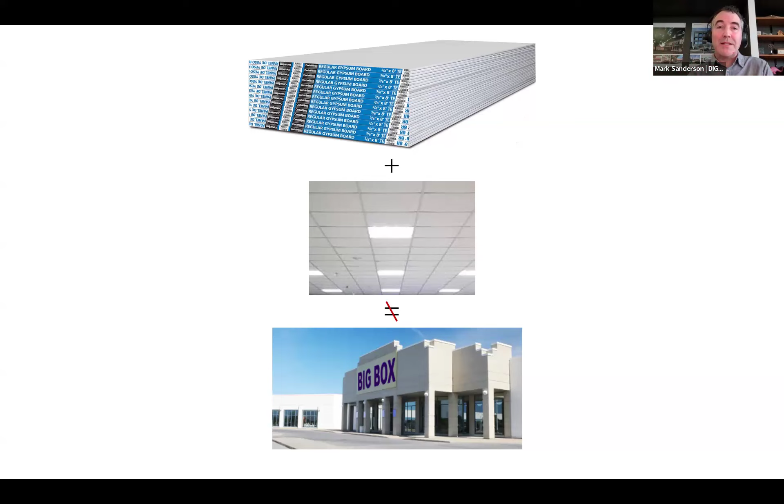That kind of comes at odds, and this is a slide we show often when talking about our work. The way we've come to understand the practice of architecture today is that it's really focused on selecting materials for assembly rather than making, and craft and skilled workers are not as prevalent or highlighted as they once were. This selection of manufactured materials from who knows where—oftentimes we try to track that for different reasons—but they are typically not of a hand or a place or manufactured. They're assembled in ways that lead to placeless or anonymous architecture.

At odds with that is the Clay Studio, and that's one of the things we really loved about starting conversations with the Clay Studio—it is all about making, from the entire spectrum of skill level. They have beginners, teaching all sorts of age groups from the city the craft of ceramics, but at the same time they have residents, artists in residence, international artists with incredible acclaim, and their footprint in ceramics is very much national, but international as well. So we really felt connected to that sense of craft and making.

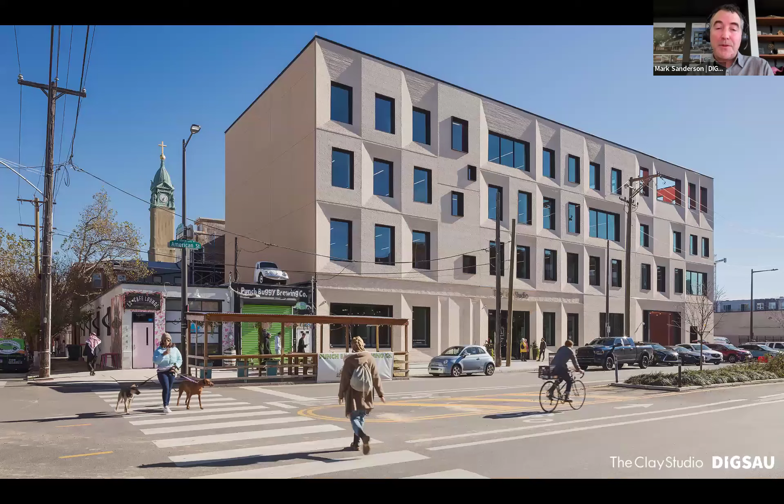So this is the building where it ends up. We're going to go deeper into that, but it's located in South Kensington on American Street.

The next slide shows a picture of some of its earlier roots. The Clay Studio was started, I think, very much as a grassroots group of artists that grouped together to create this kind of place to make art and ceramics, but it grew from there.

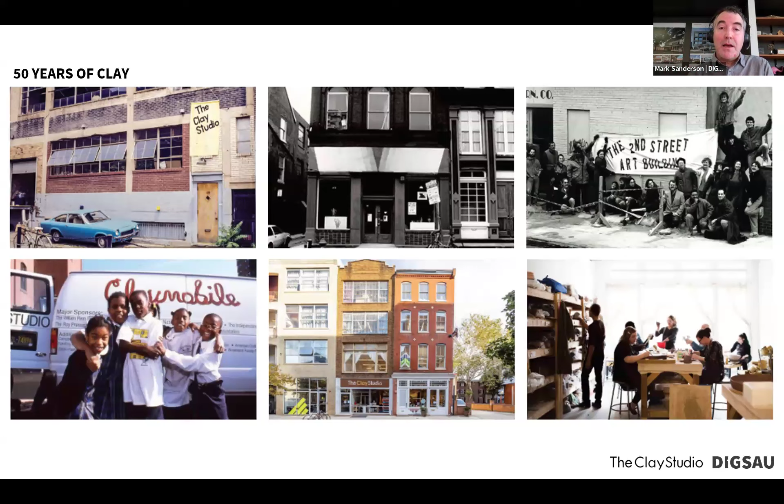They were located over on 2nd Street for many years. That lower middle picture is a place that maybe if folks had visited, they visited that studio—it had taken over two, not row houses, but row commercial spaces right along Elfreth's Alley there. And the interior was, as you might expect, a warren of spaces and storage and studios that had been added onto and collected over the years.

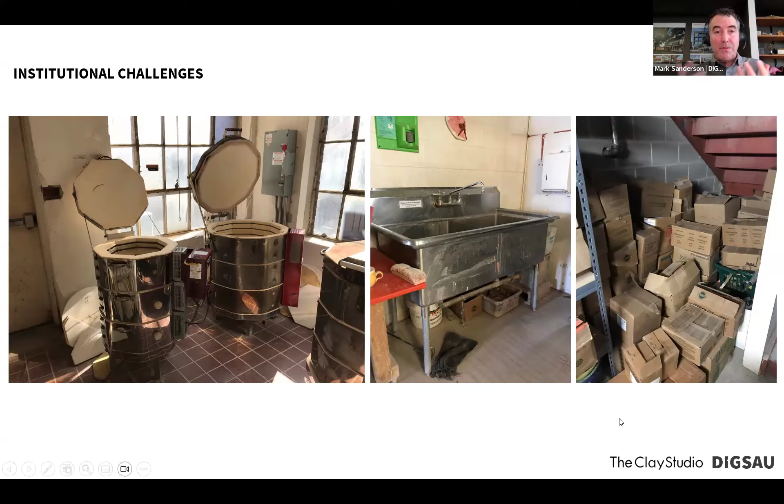One of the things they knew, because their spaces were so segregated in these two structures, was that the community was not as strong as they wanted it to be. So that was one of the major goals of this effort—to build a greater sense of community for them. So we began the search for different locations.

We visited maybe 10 or 12 alternate locations, trying to find a location in Philadelphia that was not going to disconnect them from who they were, but at the same time be a part of a community.

The owners of the Crane Arts building actually were the owners of this site, and they gave a favorable purchase price to the Clay Studio in order to get this site, because of their own sense of values. If anyone has been up on this portion of North American Street, it's dramatically different than when we began our project there—there are probably several thousand apartment units, as there are throughout Philadelphia, but this is really a transformed street over that time.

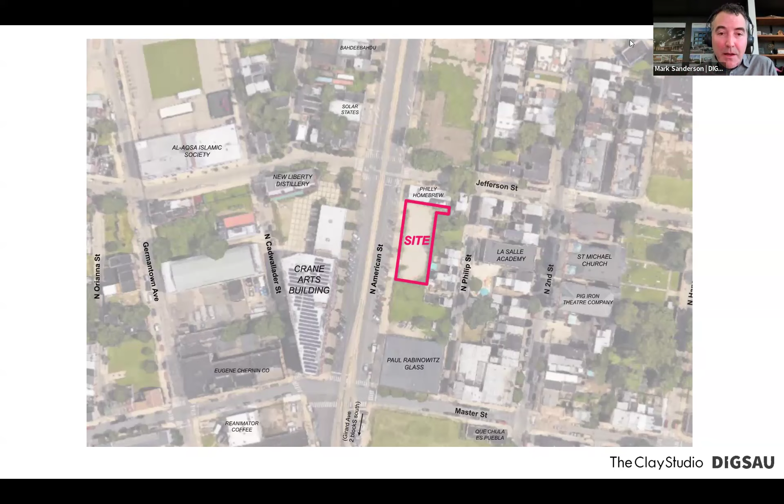So the next image is, again, kind of going back to the sense of making. The sense of this was something we began to think about in terms of the hand, how this particular craft is made. There's a sequence to it, and this is something we found really interesting—how to connect the building to the making that happens inside of it.

Those familiar with ceramics know that the first firing leads to a bisqueware. It's kind of a brittle ceramic at that point—it doesn't yet have its durability. It's the second firing that actually brings the strength to the ceramic. That's also the point when you often do the glazing—there are some ceramics where you don't, but that is where the glazing happens, on the bisqueware. It gets fired again, and you begin to get that incredible chemical reaction of the glaze on the ceramic.

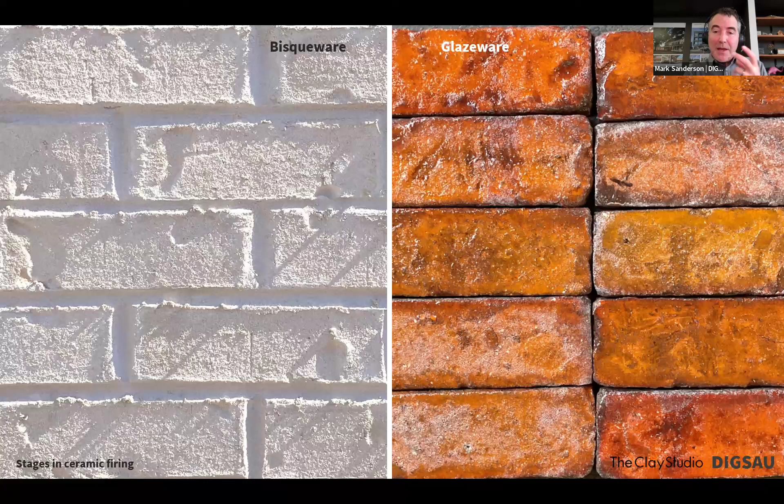So that was a point of inspiration for us. These are some of the materials you see connecting to that, where we wanted to find a brick that communicated the sense of a bisqueware versus a glazed finished brick, which we use as a highlight throughout the building.

Jesse, I think we're handing it off to you here. Is this a spot? I could certainly jump in. I think we're going to take a quick tour through the building, but I'm also happy to do that. Okay, why don't you go ahead?

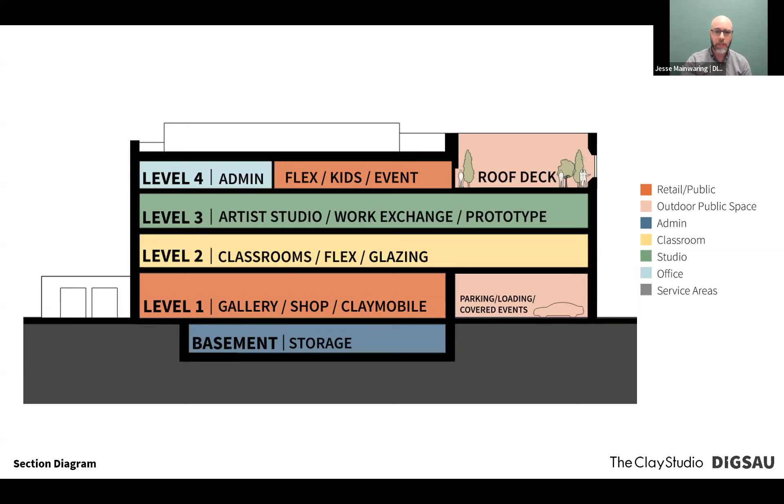So this is the section that starts to show how that program stacked up. The facade was really designed to highlight each of these program elements, almost creating a curio cabinet where you start to see them from the street, but also once you're in the building, they're organized in a way that makes it abundantly clear all the various things they're doing.

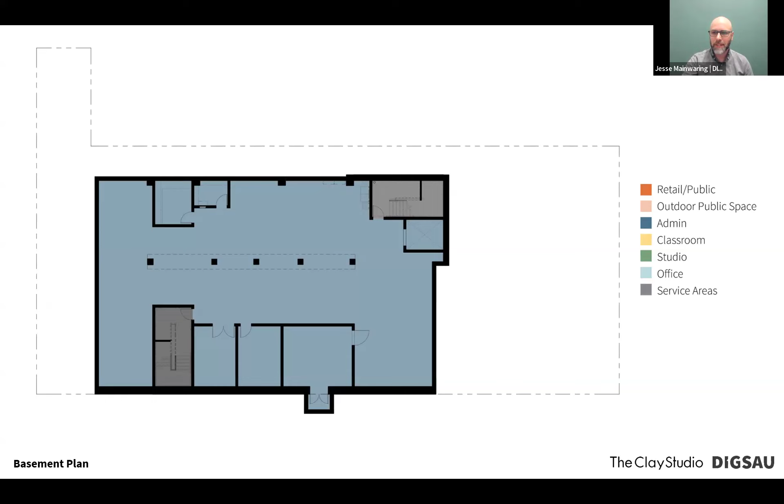We'll start with the basement, which isn't the most exciting space, but is incredibly important for them because their storage capabilities were really stretched thin previously and distributed through the whole building, which led to a sense of chaos in the space. So they actually worked pretty closely with donors to get money for the basement itself. This is one of the highlights of the project, even though it's not something most people would see.

This is the first floor, where you can start to see a constellation of various program elements. The gallery is on the left-hand side. You enter the building through what in other instances might be more of a gift shop, but they really view it as a small wares gallery. One of the amazing things about them is that at pretty much any dollar level you can walk in and purchase something that's of world-class quality. So their shop space, the first space you enter into, really focuses on those small wares, and then the gallery space on the left covers more of their...

Jesse, if you jump back, I'm going to add a couple other things there. If you could just highlight that small green space in between. Yep, so that particular little space opens up into the shop, and it can be converted either into shop space or, more interestingly, a little mini artist studio space. So you start to see the color green here.

This is one of the levels that actually has a variety of program elements on it. That little space is a place where they'll have artists come in, either resident artists or visiting artists, to do work either on display to the street, or have folks come in from the shop and just see them making ceramics right in that space.

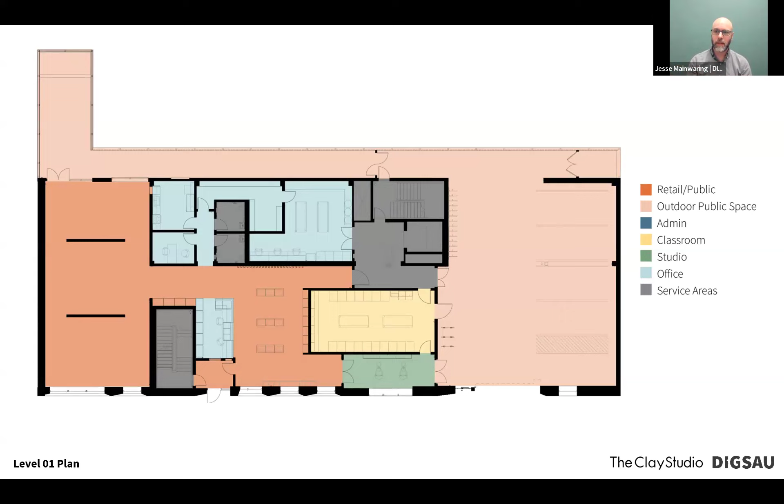That touches on one of the key challenges of the project: the building is 40,000 square feet. As Mark mentioned, we're really maxed out with the largest building footprint we could get to. They could have easily had a 60,000 square foot building and made use of it. So every area where we could have a space do multiple things, we did, and that parking or pavilion area is one of the key spaces. They had a budget for about a 15,000 square foot building. Yeah, we stretched the dollar.

So this is a shot in that shop space. The cup wall, which they're really proud of, is on the right, and that's an area where you can see some of those small wares that I was talking about earlier. And you're looking back into the gallery space.

So there's a high level of finish down here. This is one of the few spaces that isn't really rough and tumble and isn't firmly focused on making, much more on the presentation side.

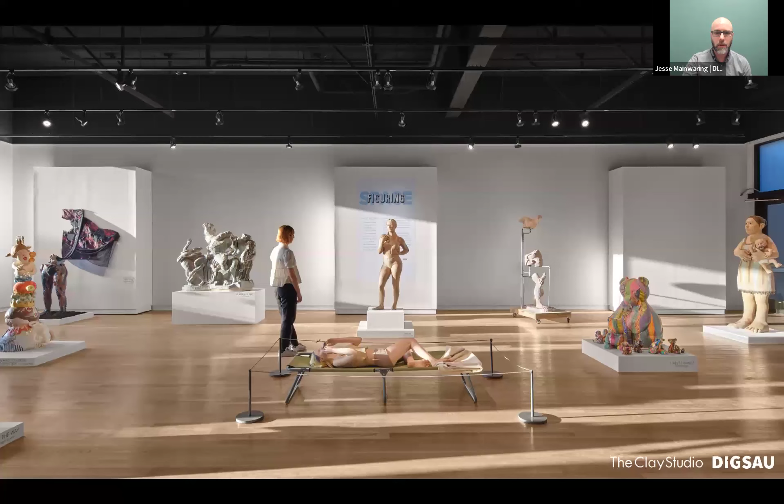Here's a shot within the gallery. Fairly classic gallery space, a lot of overhead structure in place to support hanging things when they want to, but it's really kind of a clean presentation space for the variety of their gallery shows.

And here's a glimpse into that events or parking area. This is kind of the day-to-day experience of it, when the Claymobile, which you see on the left, is kind of loading things in and out, and they're using it as a key logistics center. But you can see we elevated the finish in that area to use the glazed brick, so that when it flips over into party mode, it does not seem like a parking lot. It is very clearly a kind of partially enclosed event space at that point.

Moving up to level 2, this is the key classroom space. It's packed to the gills. One of the interesting things is every student who takes a class here gets a cubby. And so what you see in these little cellular structures along the hallways and flanking the gallery or the studio spaces are all the cubbies. And so the building was designed to handle 600 students. There's 600 cubbies. If they want to increase that, they need to increase the cubbies. So we packed that space as full as we possibly could.

There's a range of gallery spaces, studio spaces for wheel throwing and hand building and all sorts of stuff in here. Kiln areas, prototyping. They have a lot of classes in the program.

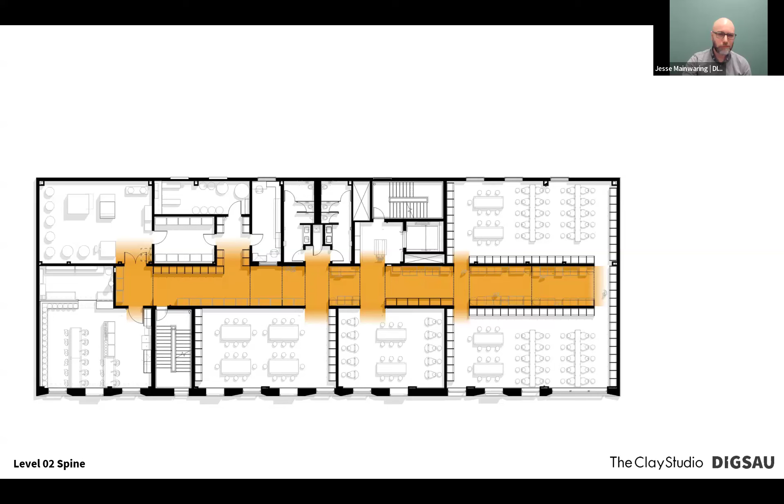And what they start to do is they pick up all of the ancillary things that a studio space needs to do. For instance, sinks, clay pressing, and a whole variety of different tools. So this is a glimpse of that space.

So we elevated the finish a little bit so that it would feel very much like the heart of the building. And that also helps to shroud some of the more functional elements within the space that you can see peeking out, a lot of the slop sinks and other areas for staging of various ceramics and so forth.

Quick glimpse into the gallery or into the studio spaces. You can see the cubbies. And again, these spaces are really rough and tumble for the most part. What you're seeing, the ceilings are the exposed precast planks. The floors are just the topping slabs. The walls are very straightforward, and the cubbies themselves become one of the key architectural features. That's all Baltic birch, which actually was really hard to get because of the conflict in Ukraine shutting down the supply line of that.

All right, then coming up to the fourth floor, this is another area where you start to get a little bit more of a range of programs happening. For the most part, it's focused on events. There is a small studio space that you can see up at the top. This is where they do a lot of their after-school programs for kids, but it's also a place where if you wanted to rent it out as an organization, you could take over the space and do team building exercises and things like that. And then there's a large covered or open roof deck and some administrative spaces up there.

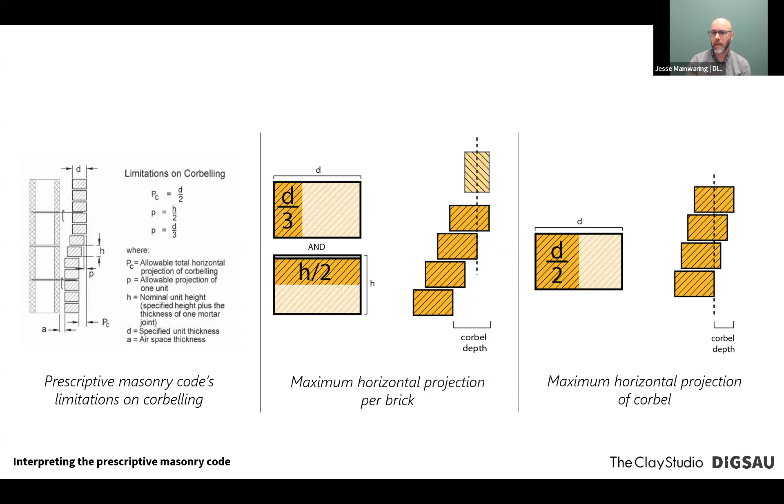One is the limitation of how much you can corbel an individual brick per course. Two things govern that: dividing the depth of the brick by 3, and the height of the brick by 2—that's what you see in the center image. The other is the maximum amount of projection for the entire run of corbel you can get, which is really shallow in the prescriptive values: the depth of a brick divided by 2.

So this is simply looking at both of those versions. What you see in the center would be the maximum amount of corbeling or depth we'd be able to get within the facade if we followed strictly the prescriptive path—just under 2 inches, not enough to do the kind of volumetric things we wanted to do with the facade, as Mark described. We were heading more into the 7 to 9 inch range, which is starting to show up on the right-hand side.

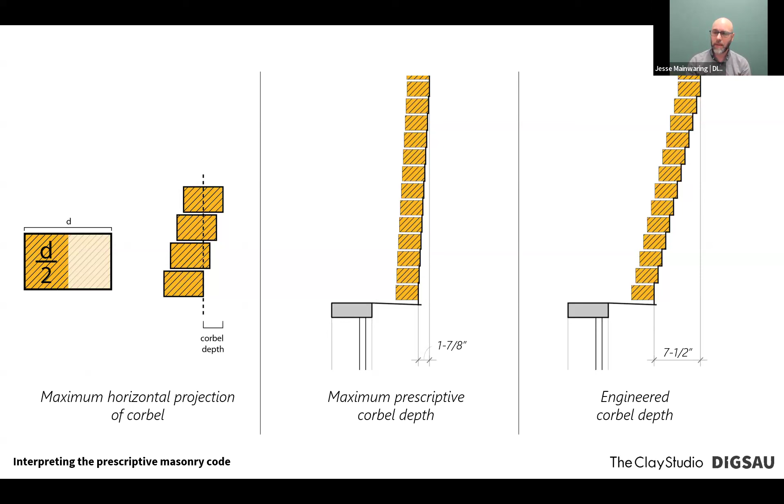It became clear to us that we were going to have to engineer the corbel beyond the prescriptive values within the brick code to do that. It means every element of the facade—the ties, the backup assemblies, and so forth—ultimately would need to be engineered.

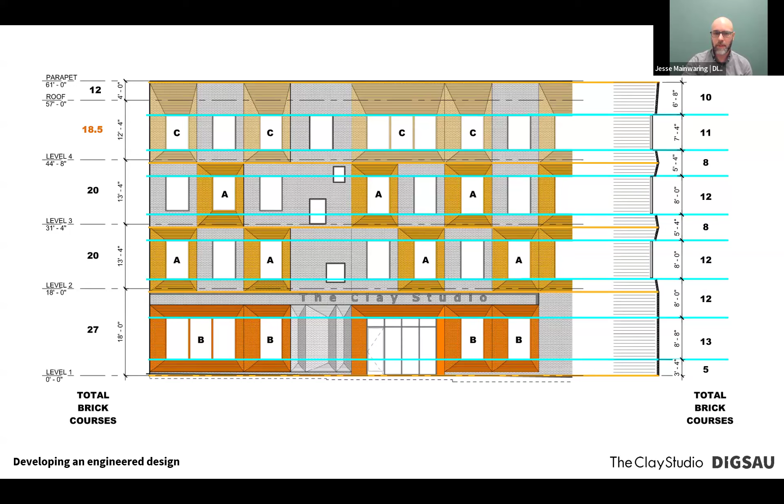So this is a diagram we did early on, trying to regularize the facade as much as possible, coming up with modules we could deploy, so we'd get the range and expression we wanted within the facade, but playing by a system of simple rules. We came up with three different modules and ultimately deployed those in a pattern that stopped the eye in interesting ways, while providing a simple common framework for the facade.

What I'm going to do now is walk through quickly a series of the various bearing elements and how the various components of the building work together.

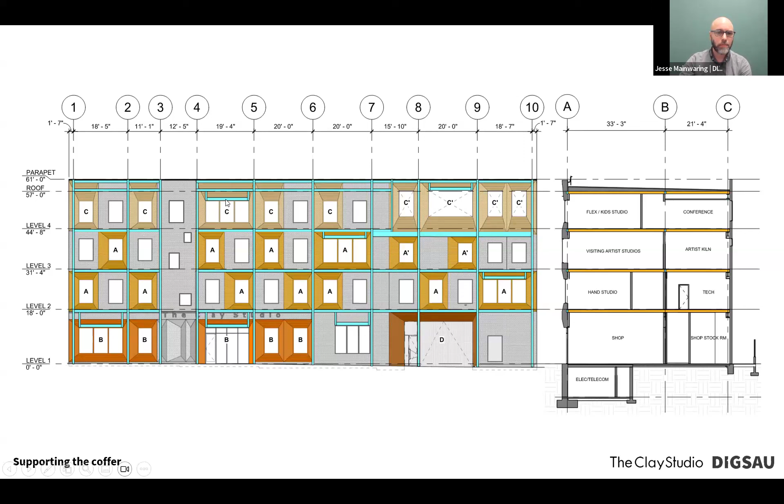The building is a blend of precast planks for all the horizontal structure and a load-bearing tube steel frame. What you're seeing in blue is the tube structure that supports the brick, highlighted on top of the brick pattern itself. The bricks get relieved at every level, so we're really only trying to carry one story of brick at a time. Within that, we also tried to limit large openings that would require supplemental support—you can see a few instances where openings exceeded what we could do with a loose lintel, so we get a secondary lintel tied back to structure that supports that.

As we got into what that backup assembly would look like, we evaluated three different ways of dealing with a cold form assembly that could support the depth of that facade. Because we had about 7.5 inches of depth, that brick load was going to put some overturning into the cold form—it wasn't only dealing with the kind of lateral wind forces a backup assembly would typically handle. So we needed a strategy that could handle all of that.

The first thing we looked at, the most conventional cold form on the left, would be to run it plumb and vertical straight down the building, with the brick itself carrying all the geometry. That would require a lot of variation in the brick ties—probably an unreasonable amount—and it wouldn't give the masons any geometry to play off of. They would really have to lay that brick up almost blind, which we saw as a real challenge.

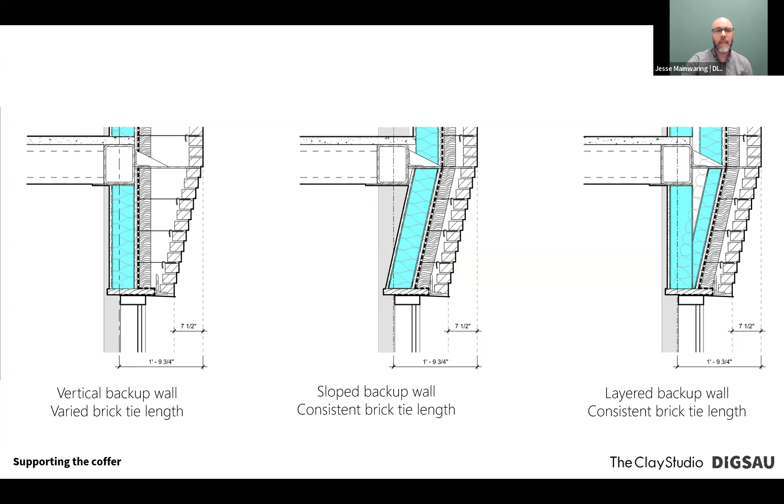An alternative, in the center, would be to slope all of that framing, but that creates really complicated detailing on the cold form side and pushes it out of what's feasible. So where we landed was the approach on the right-hand side, using a double layer of cold form: an internal layer that's plumb and straight, designed to handle all the loads, and a much thinner, lighter layer on the exterior that provides the geometry. So the masons were given effectively a template through the backup assembly that carried all the geometry, and it worked out pretty well.

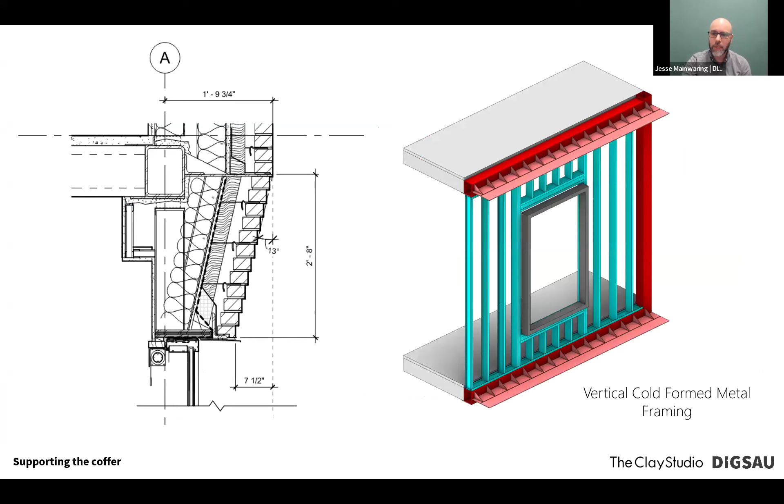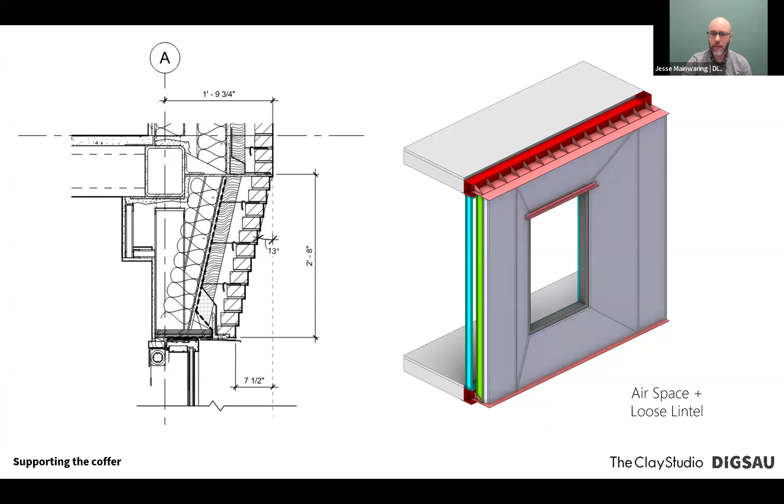I'm going to go through a quick series of slides showing that three-dimensionally. Here's the tube frame—you can see an integrated brick shelf embedded in an upturned HSS beam. Here's the first layer of cold form being added, then a second layer for the geometry. Then we start to get sheathing applied, and now you can see the geometry a little more clearly, followed by a conventional assembly going on top of that, all the way out to the bricks themselves.

How we would handle some of the brick transitions at key moments of geometry became a real talking point. This was our first pass at it, where we looked at pretty much every course. This diagram follows from the head of the window and covers every course as you work through the diagonal, and we were looking at how cut bricks could be used to achieve that. For the most part, the building's on module, but there was no way to maintain the module in that dimension without custom bricks, which we couldn't afford.

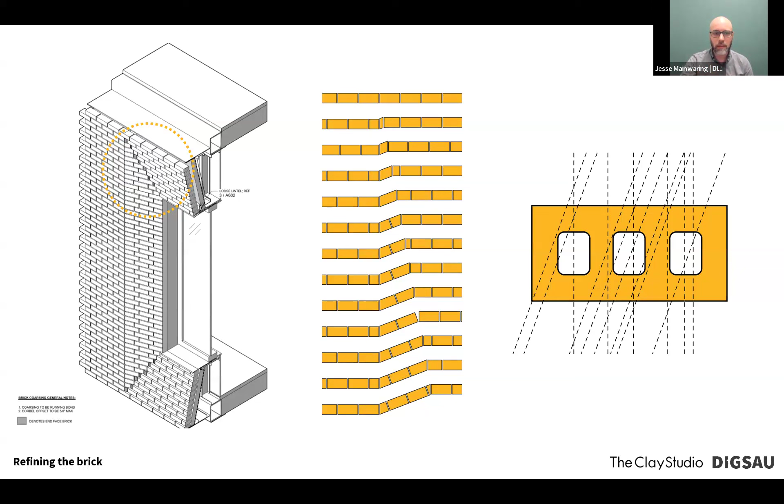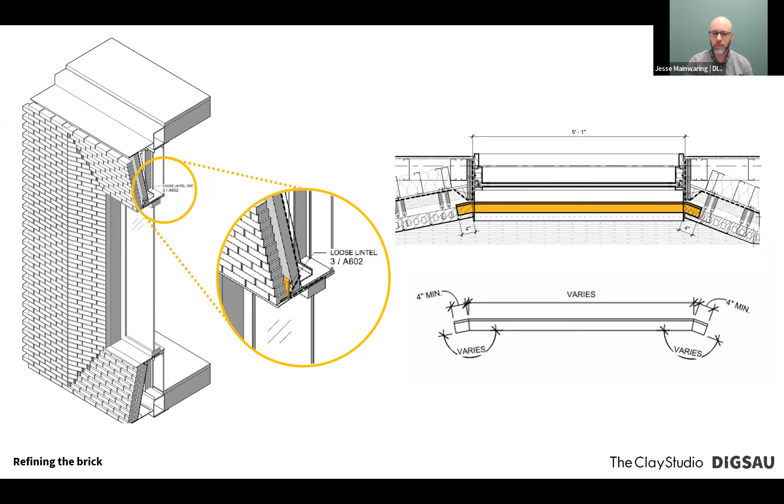Our initial thought was to embed all of the cut bricks within that angular joint. I'll circle back to this a little down the line. For those curious about achieving a loose lintel in an angular geometry, we had to inflect the loose lintels to carry that geometry, and we worked with the engineers to push the limits of that.

One of the last things we looked at in the design process was how we might manipulate the bond further. These studies on the left show adjusting the bond or displacing bricks within a conventional running bond. What we quickly found was that was the wrong design move—it panelized the facade and took away from the volumetrics of it.

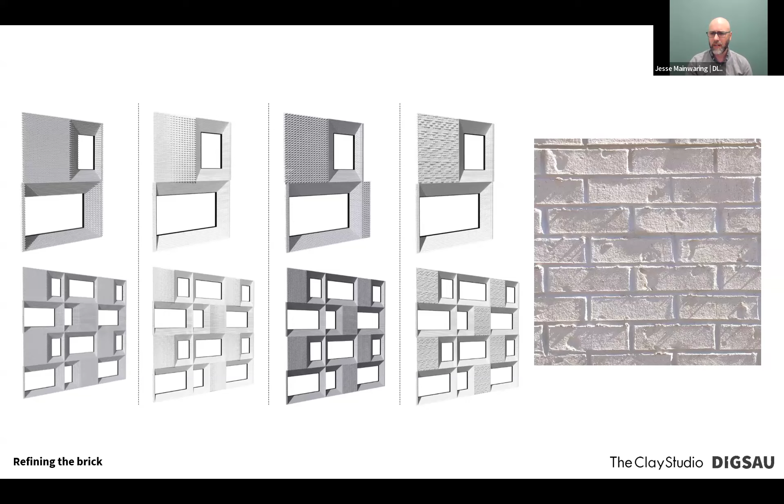Where we really landed, which is what was built, was that it was the brick itself that should carry a degree of variation and an expression of craft. So what you see on the right is the varied bricks that we ended up using.

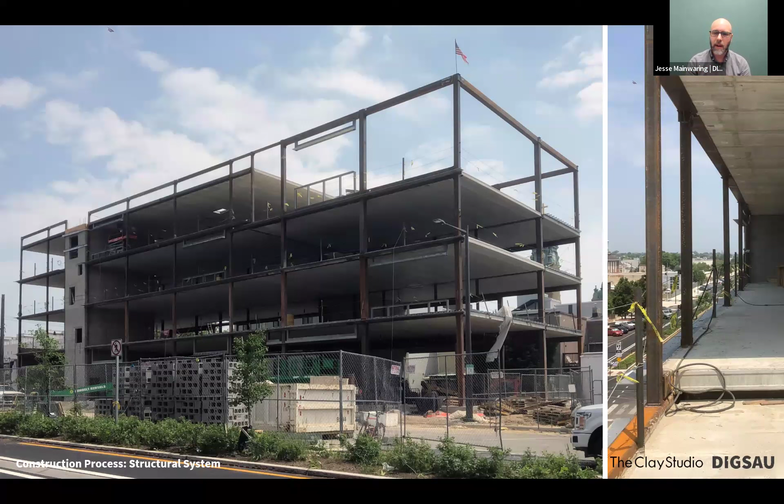I'll run through some construction shots. Here you can see the steel topped out, with some of the supplemental lintels that carry the larger openings. On the right-hand side, you can see the precast planks engaging with the upturned beams.

We ran through some quick mock-ups of the cold form and found it was actually a really simple thing to do. We were concerned about it during documentation, but the cold formers were great—they worked with us and we found ways to refine it even further.

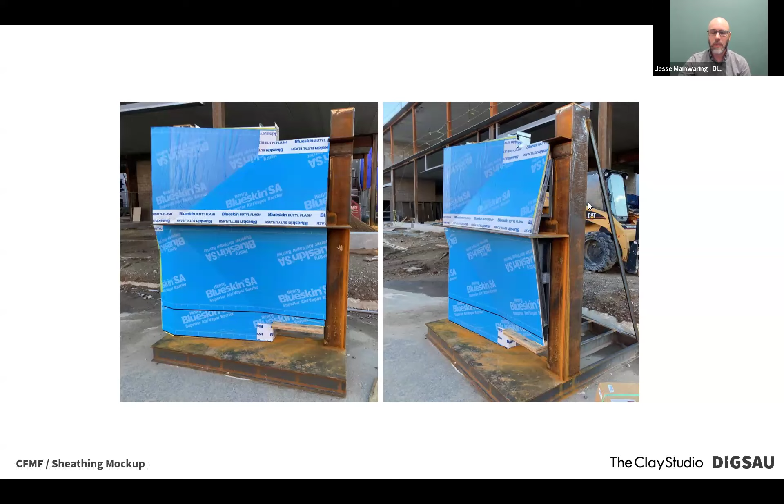You can see how slender some of the exterior members got once the cold form engineers took over and did their delegated design. As that went up, it was interesting to see the skeleton of the building start to emerge along with the geometry, and it ended up being one of the more seamless aspects of the design.

You can also see we had a significant fire retardant treated plywood buck that carried all the windows and openings. For the most part it's an incredibly conventional cold form backup assembly with a bit of an unconventional secondary layer added to it.

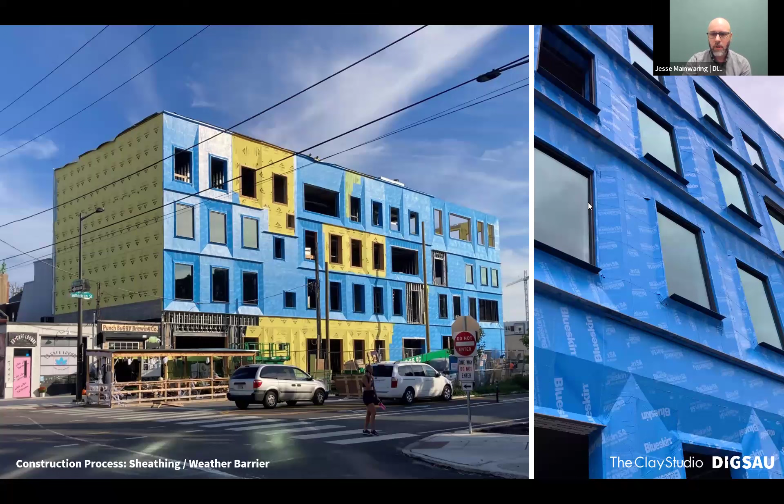Here's the building wrap starting to go on, with the enclosure getting to the point where the brick's ready to roll. This is where a lot of engagement with the masons was required to contour the bricks exactly how we wanted. We ran through three mock-ups before we got it right.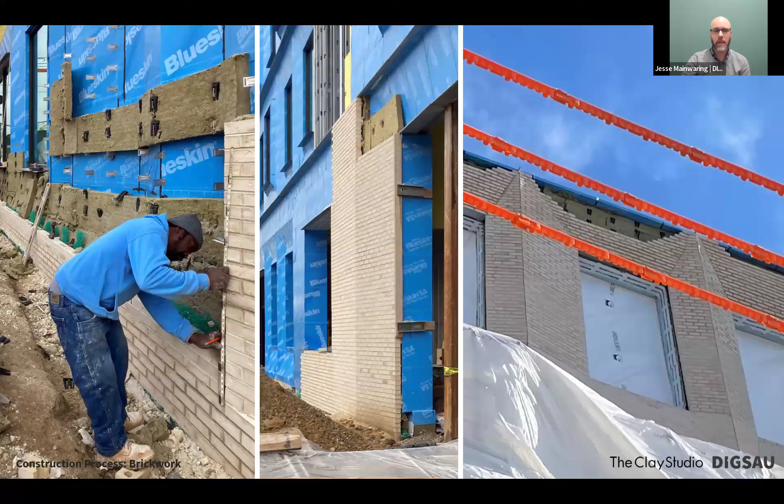Some shots of them beginning to lay this out. The first pass on the building was tricky—it's one thing to get it right on a mock-up, another thing to get it right in the field.

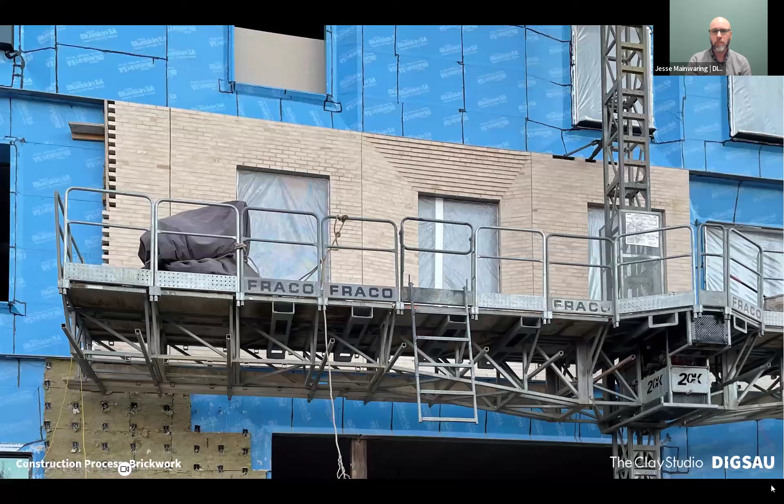So you can see some areas that ultimately had to get adjusted later. That area on the upper right had too much waver and they had to take it down. But for the most part, it went really, really cleanly. We were really happy with it.

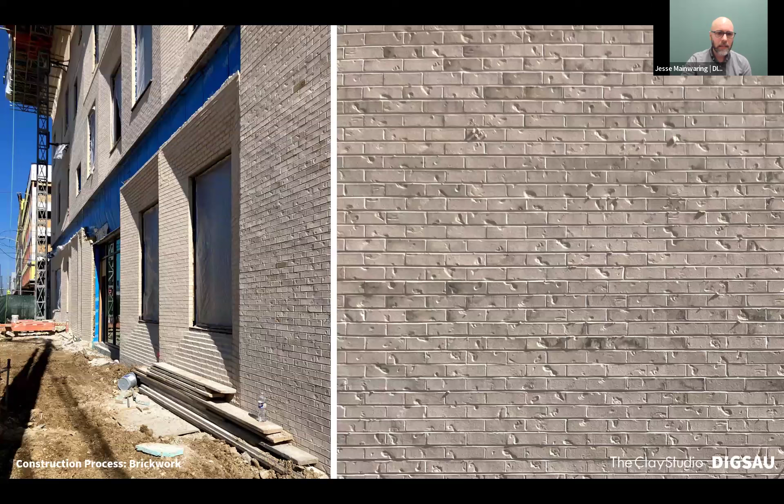There's some degree of precision in this, so the corners look nice and crisp. But on the other hand, there's a good amount of variation that we think really speaks to handcraft and provides a lot of surprise and human touch to the building.

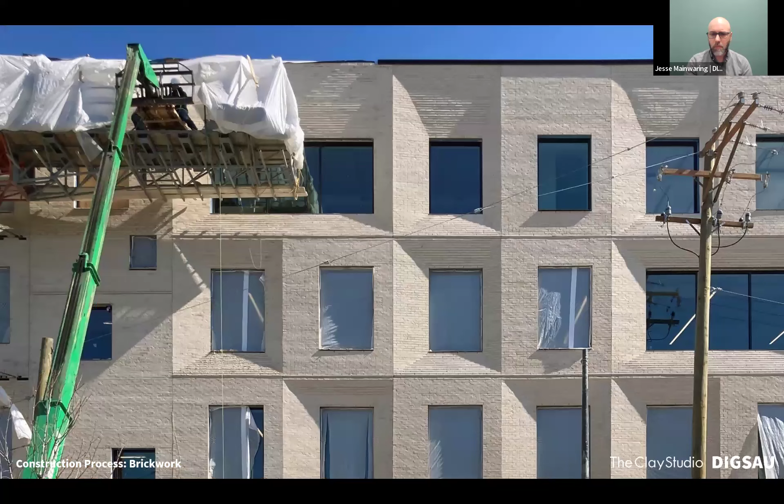So here you can see both the effect of those varied bricks with sunlight raking across them, and a sense of what the coffers looked like as they were advanced further. And here's the building almost complete. Here's the brick topping out, and then the view without the mural there.

Let's just kind of bring it to a close so we can open up for questions, Jesse. Yeah, that's really it. So here's the final image.

Again, we were really happy with the balance that we achieved with the masons between precision and crispness and that human touch. And we know the Clay Studio has been really happy with the building as well. So with that we'll rest and get into any discussion.

I have a few. So first off, this was when we came to you guys with the prompt for this, this was exactly what I was hoping for. So getting into the nitty gritty, what was the thing in your studio that made everyone crowd around and say, what do we need to do here?

Thank you for sharing so much of that detail and information. Very exciting, and I appreciate you sharing. One thing, before we jump into questions, can you just name the design and construction team, give them their little shout out, and talk a bit more about that collaboration?

Yeah, we worked with Jeffrey M. Brown, who many of you have worked with. They were a Philly construction team that had been around for a long time. They were brought into the project early and were engaged as a CM, I think probably about halfway through the design development phase, and they carried it through to completion.

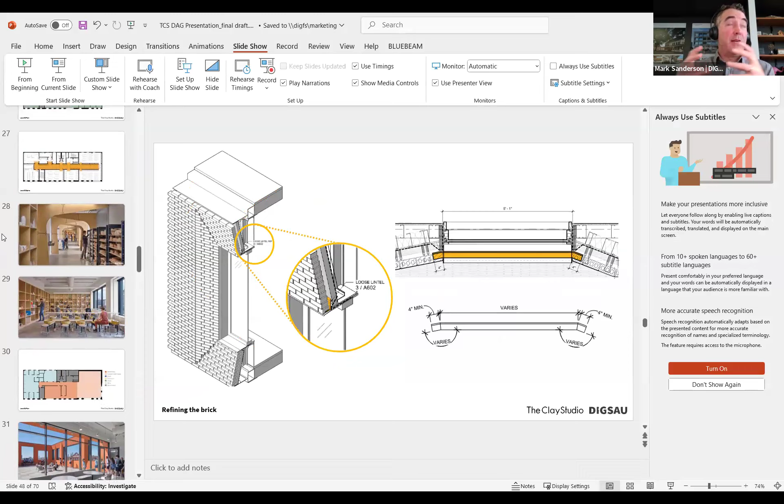Yeah, I would say it started with really condensing their program down to its absolute necessity and core, and that resulted in us trying to find as many ways that we could kind of cleverly use spaces for more than one function.

All that being said, once they launched and opened up the studio, they have a waiting list for their classes now that is several months long. They've been incredibly successful in both their fundraising and their movement forward. And as most organizations that find that success, they very quickly decided that they made it too small, although they absolutely could not have added another foot.

And we were stretching their funds, and it was a really fraught construction process. So the very first point was that kind of condensing of the program. The second one is in the bidding.

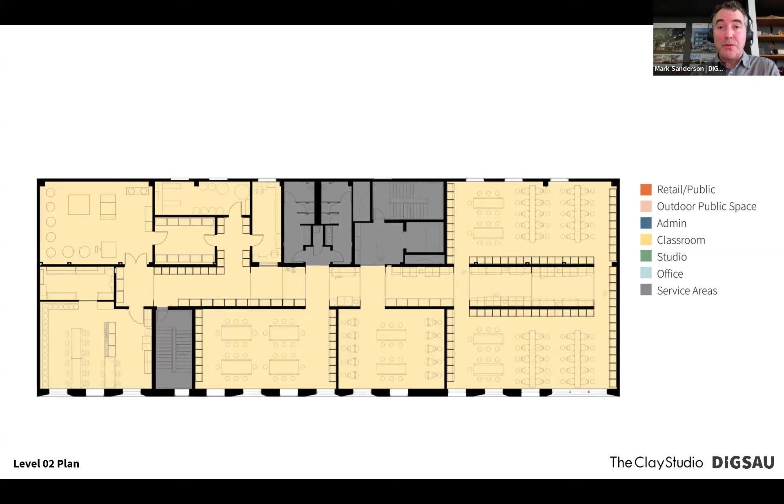I think one of the things that Jeffrey Brown did is they had opened up a very wide range of contractors and subcontractors into the field. That led to a variety of quality issues throughout the construction.

I think that was the core, the secondary part of what Jesse was talking about with the multiple masons on the project - the speed with which they were moving was just not quick enough. So those are two elements that are very specific. And then this image here, I think, is one that just shows, it's a very raw building.

It's plank construction. We wanted to use plywood that we knew could be durable and take a beating. The floors are concrete. We do have some acoustic ceiling panels, but those started to get value engineered out. That being said, it's an incredibly robust, complex building because the mechanical system is very complicated and high-end due to all the silicates and filtration needed. The kilns generate a tremendous amount of heat, but that comes with the necessity of a lot of power. There are just a lot of elements to the building that couldn't be value engineered, so we took every point that we could.

If you want to raise your hands or drop questions in the chat, I'll get to them. I did have a follow-up: there are some famous examples of institutions getting the building they wanted and then not being able to maintain it long term. How have you worked with the Clay Studio to make sure the building is part event space, something they can monetize, to help ensure longevity? I'd say our relationship with the Clay Studio started as a pretty standard architectural commission with a client, a designer, and an architect.

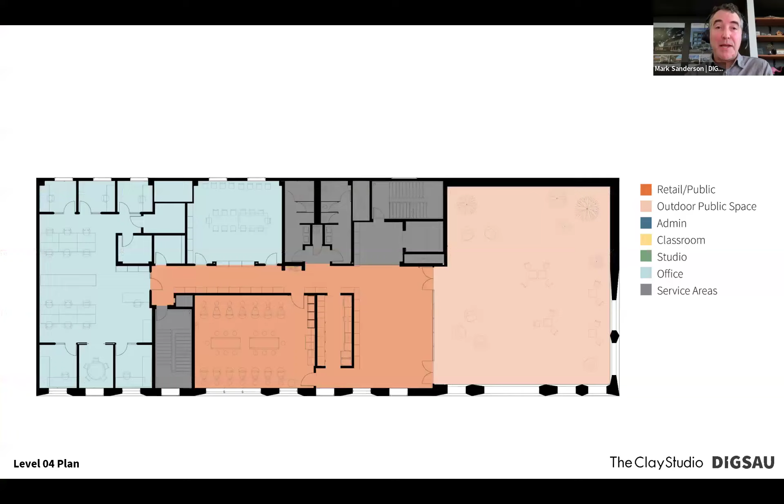They've also come a long way with their fundraising. There was a shift in executive director during the process, and the new executive director got their legs under them and became a powerful voice representing the Clay Studio in fundraising. I think they've been really successful because they've shown the impact they're making. The other thing they have is an incredible reputation for their connection to the community—South Kensington, the Kensington community, and beyond with the tentacles of the Clay Studio. A really great organization.

Nika, do you want to jump in and ask your question? Sure—considering this is such a unique program, I was wondering if there was any design solution you were most excited about, given the particular problems that might have popped up.

Jesse, I'll let you add to it, but I think this particular image happens to show the space that really was a watershed moment in the design. We were kind of shoving 10 pounds of material into a 5-pound bag, and it just wasn't working. We kept coming back to Jen Martin and the studio folks, saying, 'what about this?' And they'd say, 'no, we need more seats, we need more cubbies.' It doesn't work without it. And we said, well, your budget also doesn't work with it—so how are we going to make this come together?

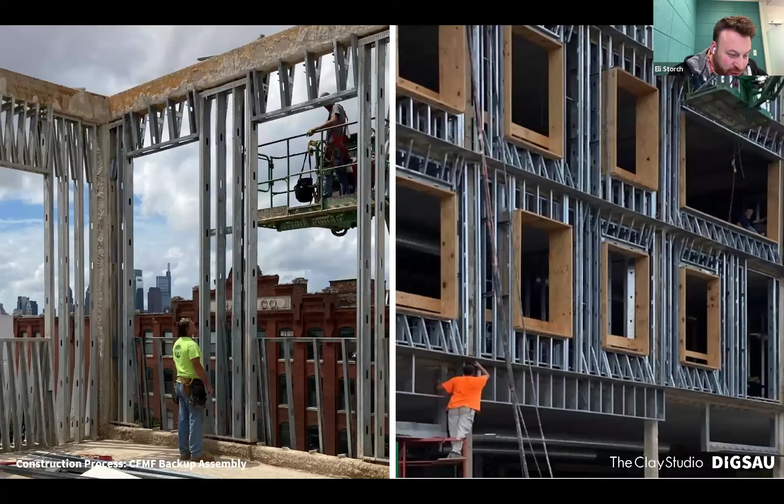Thank you. So, interesting question here from Jack about that slide you showed with the three different mock-ups of the brick. It seems loosening the control resulted in a better end product. Did this require increased site visits or different types of communications to set expectations or control point alignments?

Yeah, we were there. It was nice that the building up in Kensington is so close to our office—we can be on site in 10 minutes—so we were there constantly while the brickwork was going up.

Each one of these instances, before the first version was erected, we met on site, we talked to the masons, we heard how they wanted to do it, and it resonated with us. I think they were probably a little bit hesitant to get too far with us before really trying it out on their own.

So they went for it, and we met and walked through every little instance—what we thought was working well, what wasn't—and worked with them to try and streamline it. That second version, they'd learned a lot from the first, saw ways they could improve, and then we had our own aesthetic goals too, involving the location of those cut bricks. So we worked with it.

It seemed like it was likely feasible, but it posed certain challenges.

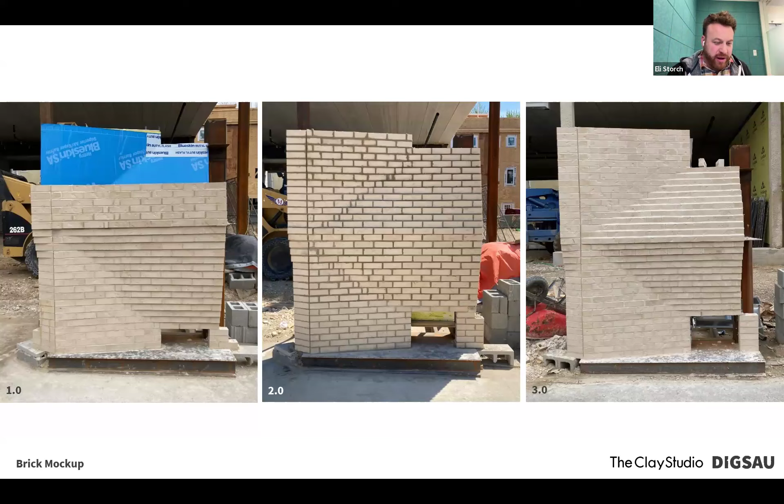So let's finish with a material question. Maxim and I are on the same wavelength here, talking about material selection. You started off with the bisqueware versus the glazeware—are there any other instances of the glazeware besides that public event space you showed? Can you talk about what the actual uniqueness of the brick that was finally selected was, and any other specific unique materials in this project?

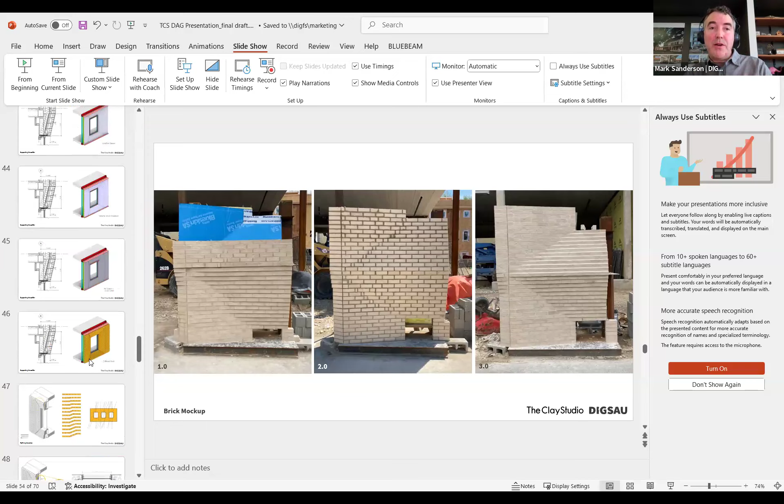I'll just start with the brick itself. Because we were on such a budget, it was very hard to find brick that we could afford that gave the quality we were hoping for. So there was a long discussion about red brick versus a more earthy bisqueware tonal quality, which we felt was important for the building, and also to highlight the differences between the two types.

The highlighted brick, the glazed brick — Jesse, correct me if I'm wrong, was that made by Heath, or who made it? That was McNear, out of the Bay Area in California.

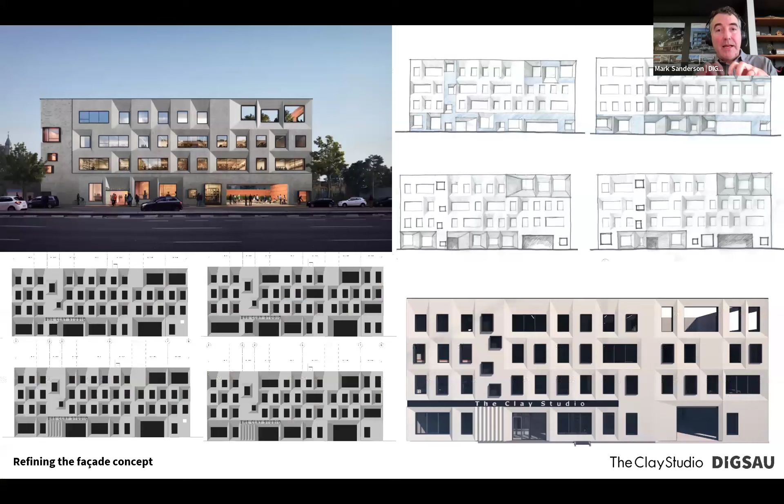They have a really wide range in the glazing, with a lot of variation, and the texture on the brick also has a lot of variation. It's interesting but expensive brick, so we had to be judicious about how we used it. The two places it got used were the public event spaces — the ground floor pavilion and the roof deck. You're seeing some of the orange stucco, but there are also highlights of that brick on the rooftop terrace. Those are the two spots that got the special brick.

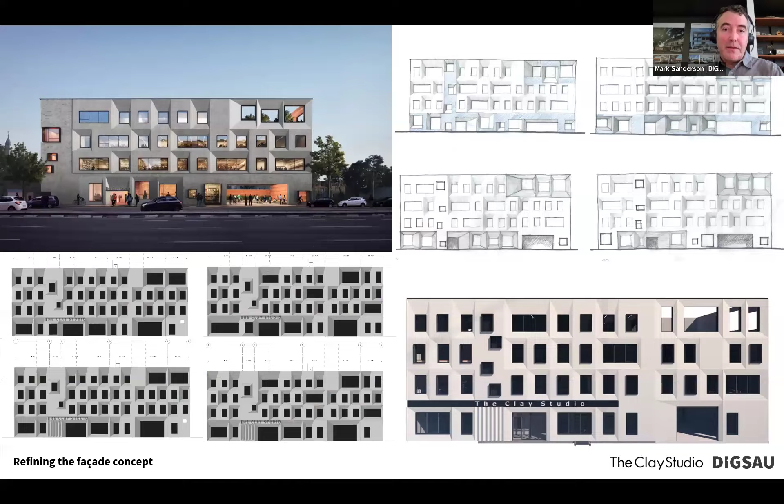We tried to find those couple of spaces to elevate the finish. Other than that, for the brick itself, we looked at dozens and dozens of bricks trying to get the right tone, texture, and color. One thing we liked about this one is it had these almost thumbprint-like marks in the texture, which we thought was a nice nod to what they do in the building.

One interesting thing with the glazed brick: we had samples in our office that we loved and showed the client, and everyone was happy with them. But over the years the project developed, they jettisoned that glazing type — the original glaze was very lead-heavy, and they got rid of all the lead.

Ultimately we had to work with McNear — I want to say they did six or seven different iterations trying to find a new glaze mix with us that hit the range you see here, with some yellows, some really warm tones, even an ashy white quality in certain instances — something with that level of variation and warmth. So at the end of the day, it was a fully customized glazing.